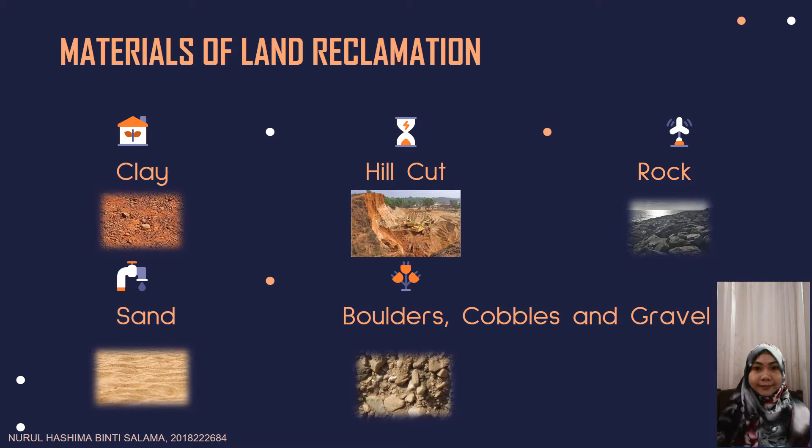Land reclamation methods. The first method is the infilling method. This is the most simple method, involving filling the area with large amounts of heavy rock or cement. The material used to fill the area is generally called infill. Next, the draining of submerged land method, used to reclaim wetlands or land for agriculture.

Third, deep cement mixing, typically used in situations in which the material displaced by either dredging or draining may be contaminated and hence needs to be contained. And the last one is land dredging. This is the removal of sediments and debris from the bottom of a body of water, used for maintaining reclaimed land masses, as sedimentation, a natural process, fills channels and harbors naturally.

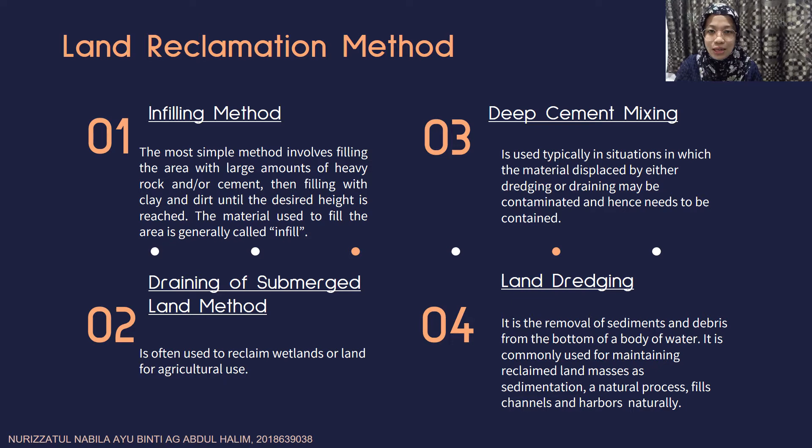Why do we need reclaimed land? The first one is land may be damaged due to natural hazards. Next, human activities, for example, poor farming methods. Third, cases of waterlogged land, for example, swamps and wetlands. And the last one is the problem of land scarcity, where it may be difficult to find new land to restore or improve.

Types of land that can be reclaimed. Derelict land or abandoned land. This land cannot be used until the damage is repaired; it is more commonly a result of human activities and sometimes natural disasters. For example, abandoned farming land, mining areas, and coastal land.

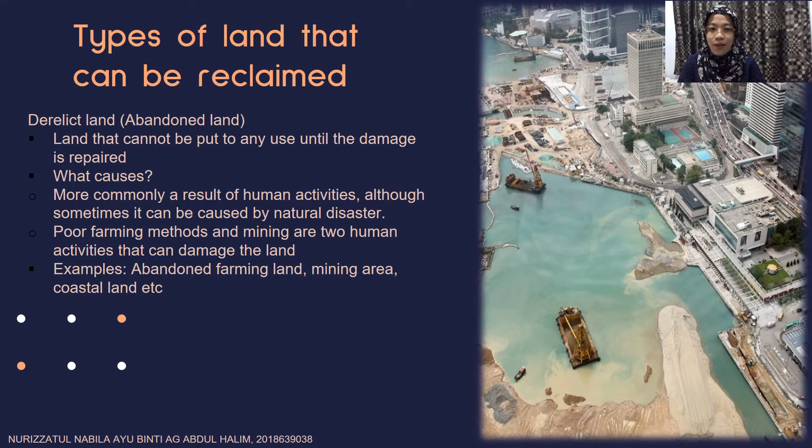There are several land reclamation techniques. They are the dry method, hydraulic filling, direct dumping, rehandling pit method, dredging, and sand spreading.

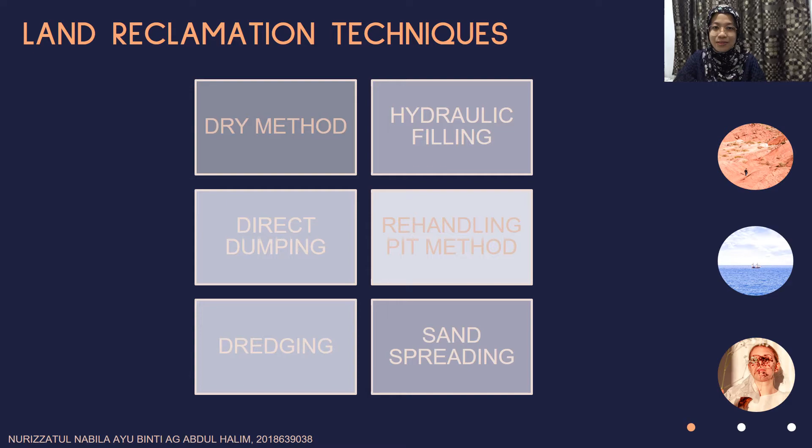Firstly, the dry method, suitable for filling material from land sources, especially rock, hill cut and clay fill. Filling or transporting clay fill material into the sea would create a viscous slurry, and it takes more time to become usable land. The dry method uses a truck or conveyor belt to transport fill material to extend the land towards the sea. This method also works well for foreshore locations with underlying competent seabed soil.

If the seabed soil is weak, because of displacement, a mud wave would be created in front of the fill. In that case, a greater portion of filling material will be required. Second is the hydraulic filling method, suitable for granular material and not for shallow seabed.

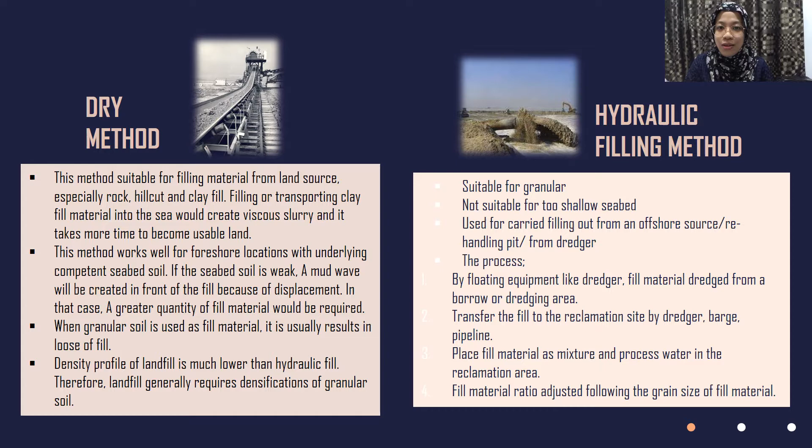This technique is also used for carried filling out from an offshore source. Third is direct dumping. This method is used when the seabed is deep. By opening the bottom of the barge, the fill material is dumped at the designated area. As shown on the slide, the bottom of the barge is opened and then the fill is dumped. This method is used not only for granular but also for stiff clay and soft clay. This method's location is generally controlled by a global positioning system.

Next, the rehandling pit method. It transports sand by barge and dumps the filling materials such as clay or rock only temporarily for storage in the pit. The capacity of the pit is normally a million cubic meters. It is dredging the sand at the borrow source by using a cutter suction hopper dredger, then transporting it to the rehandling pit.

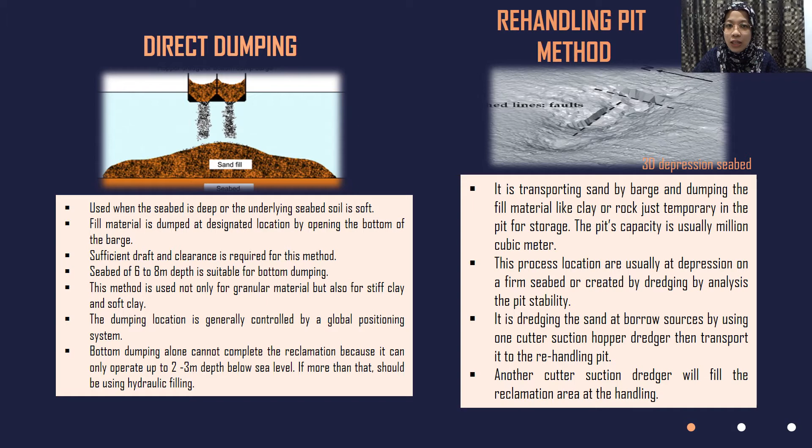Next, dredging. The dredging process is known as the removal of underwater sediment involving the method of excavation. Soils and rock are excavated for channel and harbor deepening, for land reclamation, and to keep the waterway navigable for ships and boats. It has different purposes, but the main objective is typically to recover material that has some value or to deepen the channel.

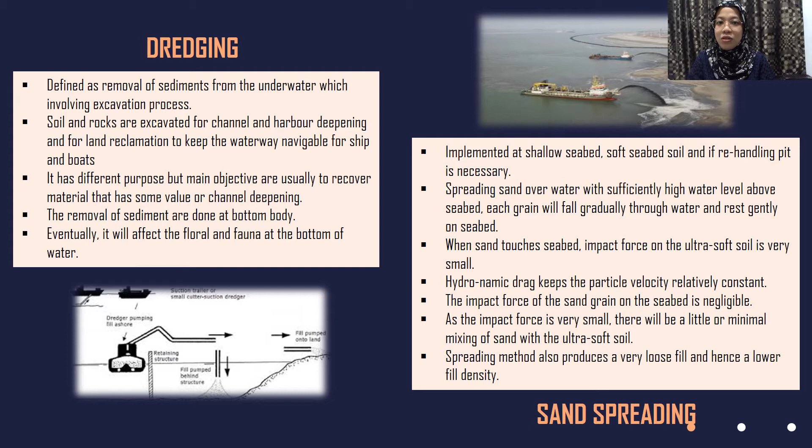And the last is sand spreading. This method is implemented at shallow seabed, soft seabed soil, and if a rehandling pit is necessary. Spreading sand over water with a sufficiently high water level above the seabed, each grain will fall gradually through the water and rest gently on the seabed. And when sand touches the seabed, the impact force on the ultra soft soil is very small. This method also produces a very loose fill and hence a lower fill density.

Benefits of land reclamation: 1. Improve agricultural land. 2. Help areas with restricted land use. 3. Reclaimed land can be used for multiple purposes. 4. It allows for further growth of a country's industries. 5. A feasible solution for the problem of overcrowding. 6. Expanding the carrying capacity of land and taking pressure off urban areas.

Challenges in land reclamation. First, initial drainage. The first phase of reclamation is drainage. This is necessary to improve accessibility, particularly if heavy equipment is to be used. The initial installation of drains at strategic positions allows access for equipment, either by temporary road or narrow gauge railway.

Second, burning. Apart from being a rapid way of removing the cut vegetation, the ashes improve the fertility of the peat in the initial years of cropping. Frequent burns can lead to rapid lowering of the peat surface, but more directly, it can lead to intensive peat fires when not properly controlled.

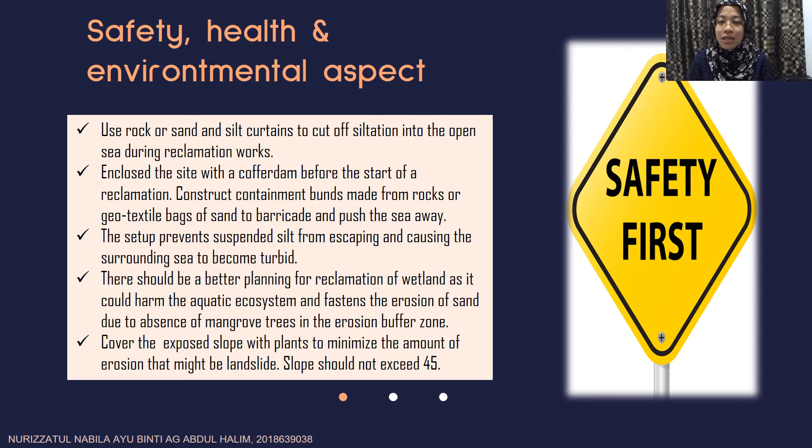First, regulated members stay current with land reclamation research, legislation, directives, guidelines, industry standards, and other reference documentation related to land reclamation. Regulated members regularly review the reference material used to support their practice and obtain more current versions when available. Attend conferences, workshops, and updates related to land reclamation. Communicate with regulators, research scientists, educators, and other practitioners to ensure they remain current with land reclamation knowledge and trends.

Second, regulated members understand the limits of their knowledge, skills, and experience, and seek the expertise of other professionals where necessary. Regulated members make appropriate scientific, technical, practical, and logistical decisions based on their education and experiential knowledge in land reclamation.

Apply their skill and use judgment in an ethical manner. Seek advice and input from other professionals when their expertise is insufficient to make competent decisions and recommendations. Third, regulated members clearly understand their role within the practice area. Regulated members understand their role in a land reclamation project and do not exceed the boundaries of that role.

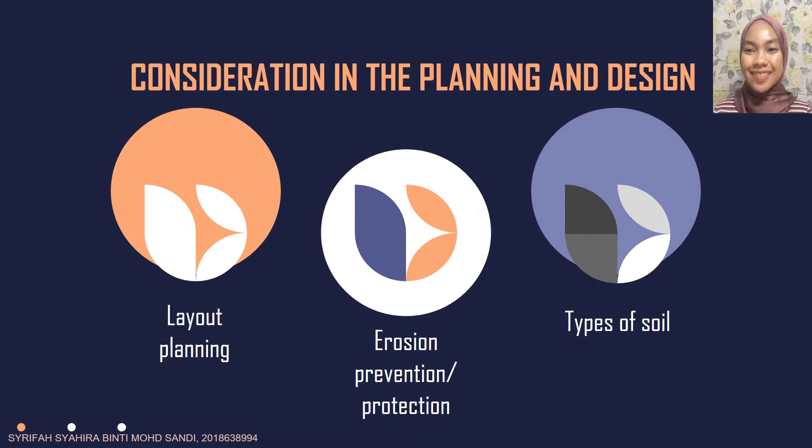First, layout planning. Any reclamation project should consider the hydraulic characteristics of the area, offshore and nearshore wave conditions, bathymetrical details, tide, and others needed for observation. The correct setting of platform level is critical to the functional performance of the reclamation works as well as its financial viability. A properly conducted engineering study is a proven and trusted approach to developing project layout and dimensions.

Second, erosion prevention and protection. Reclaimed land should be bordered by stable sandy beaches. The works to defend against erosion can be very costly and therefore must be accounted for in the outlay of capital costs. There are many forms of erosion protection measures such as revetment, articulated concrete slab or mattress, sea wall, and others.

Seawalls and other vertical face designs are typically not favored due to the possible incidence of excessive toe scouring and lowering of foreshore soil, resulting in structural failure. Another important consideration in the design of protective works is that it should not result in the transfer of the hazard of erosion to the adjacent shoreline. A classic example is groin construction.

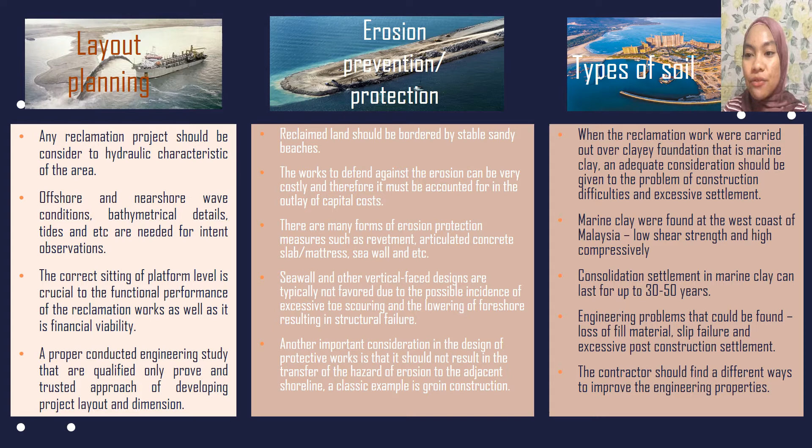Third, types of soil. When the reclamation work is carried out over clay foundation, that is marine clay, adequate consideration should be given to the problem of construction difficulties and excessive settlement. Marine clay is found at the west coast of Malaysia, with low shear strength and high compressibility. Consolidation settlement in marine clay can last for up to 30 to 50 years. Engineering problems that could be found are loss of fill materials, slip failure, and excessive post-construction settlement. The contractor should find different ways to improve the engineering properties.

Next, land reclamation guideline. As we know, the guideline is important when we do some work, to guide us to avoid unwanted work or harmful things that may happen during the process. For the land reclamation guideline, there are some policy and legal requirements related to undergoing land reclamation.

The reclamation guideline contains the important things that must be followed and cared for when we undergo a land reclamation project. First of the guidelines is site selection, to identify key potential project impact areas. The project proponent and environmental consultant corroborate the National Physical Plan 2005 published by the Department of Town and Country Planning in selecting the site to reclaim, in order to avoid coastal environmentally sensitive areas.

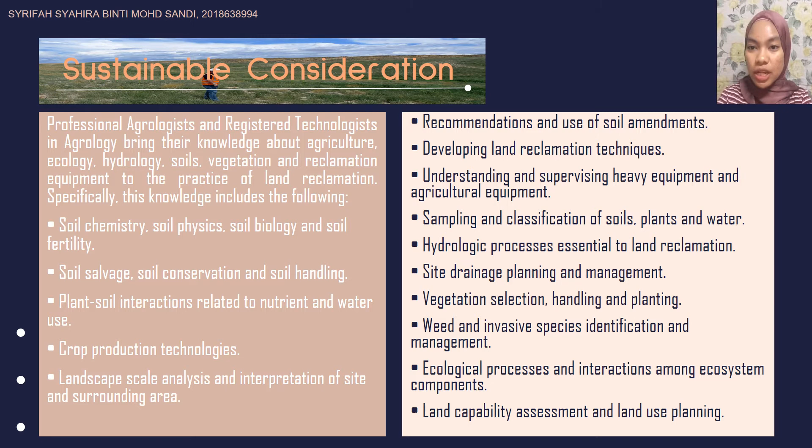For other related issues, this is the case study at Colombo Port City. This is located in Sri Lanka. The new city spans 269 hectares, which is 2.69 km². The project was launched on 17 September 2014, completed June 2019, and it cost 1.4 billion USD. It was co-developed by the Sri Lankan government and China CHEC Port City Colombo Ltd.

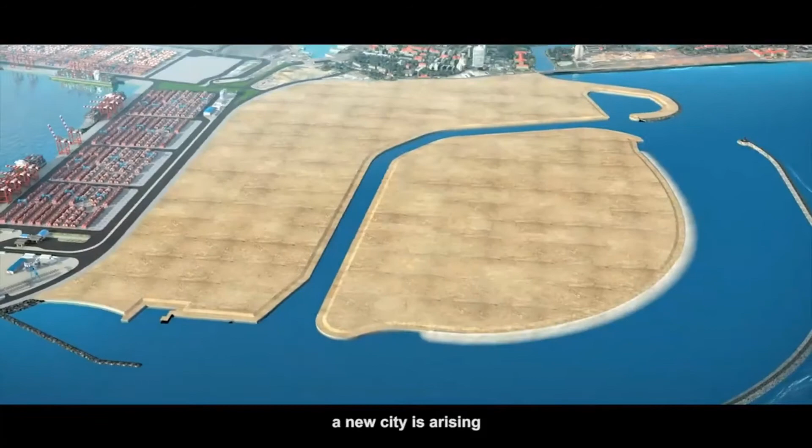At the crossroads in the east, by the shores of the Indian Ocean, a new city is rising. Port City, Colombo, is jointly developed by China Communications Construction Company, a Fortune 500 company, and the government of Sri Lanka. It is the single largest foreign direct investment in this country. Port City, Colombo's vision is to be a world-class city in South Asia, filling the void of financial centers between Singapore and Dubai. Forbes named it as one of 5 new cities that are set to shake up the future.

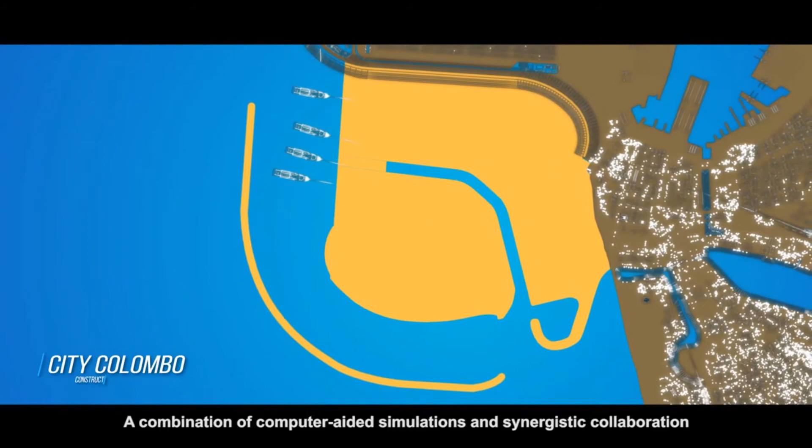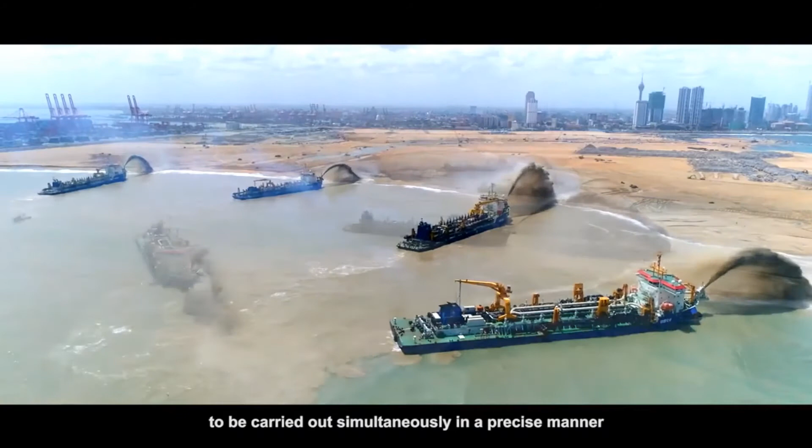In 2014, Chinese President Xi Jinping and then Sri Lankan President Mahinda Rajapaksa witnessed the opening ceremony, which commemorates the beginning of the project. Port City was reclaimed by using the open sea reclamation workmanship; a combination of computer-aided simulations and synergistic collaboration ensured the reclamation and breakwater construction to be carried out simultaneously in a precise manner. 4 self-propelled trailing suction hopper dredgers, including Asia's largest and most advanced Junyang 1, were involved, which enable reclamation to proceed 24/7 uninhibited by weather conditions and the southwestern monsoon.

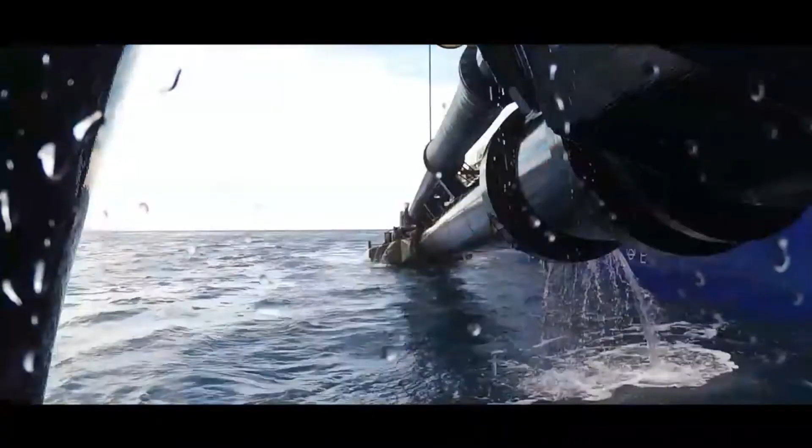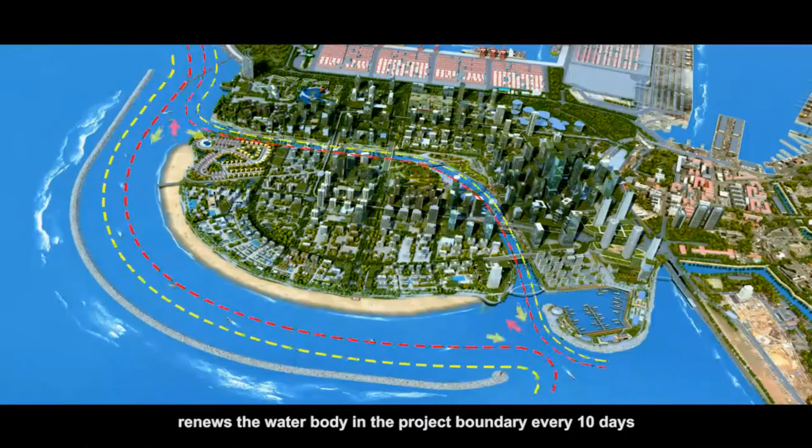The reclaimed land is then subjected to dynamic compaction and vibroflotation to ensure required consolidation density for further development. The waves of the ocean flow through the inner lagoon. An artificial canal renews the water body in the project boundary every 10 days, ensuring exceptional water quality. In January 2019, Port City Colombo completed reclaiming all 269 hectares of land.

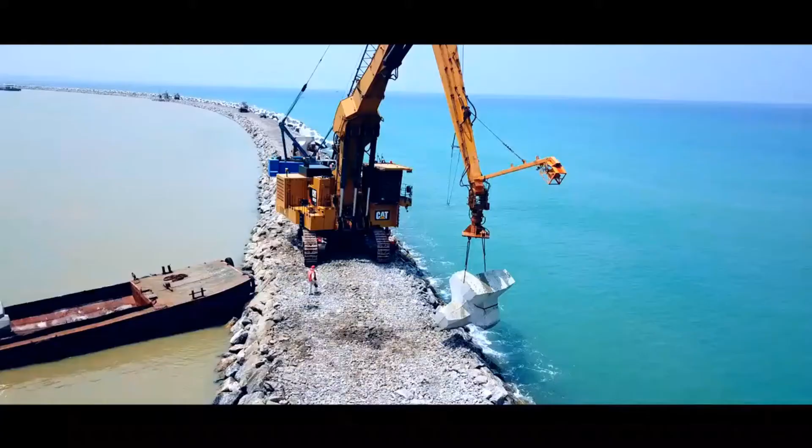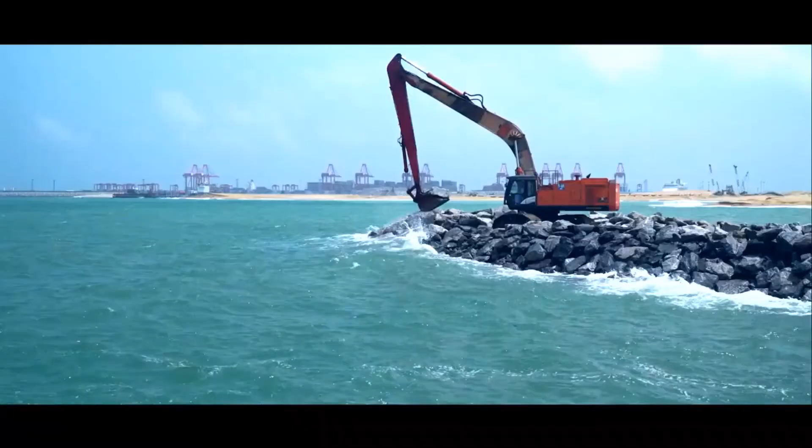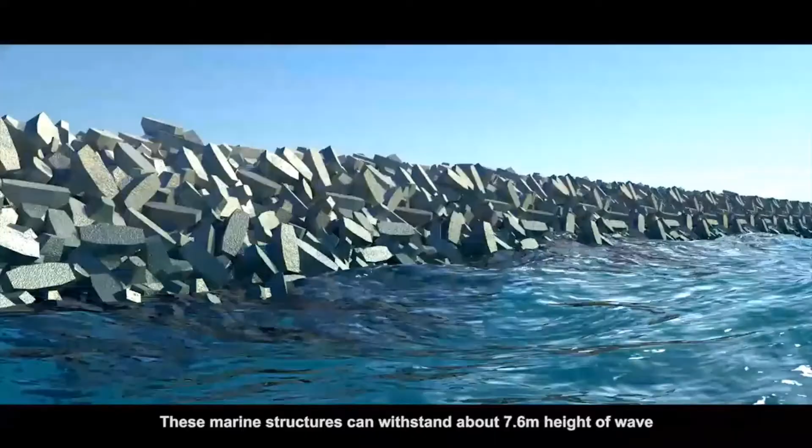The quality of the breakwater is greatly enhanced by using Asia's largest 200-ton excavator and the world's most advanced visualization system to assist in the underwater installation of the accropodes. The GPS visualized slope system with long-arm excavators ensures accuracy of slope profiles of the breakwater. Third-party independent professionals monitored construction activities to ensure compliance with strict environmental guidelines. In August 2019, the 3,245 meters long offshore breakwater and all other marine structures were completed. These marine structures can withstand about 7.6 meter height of wave, which is in 200 years return period with an overload safety factor.

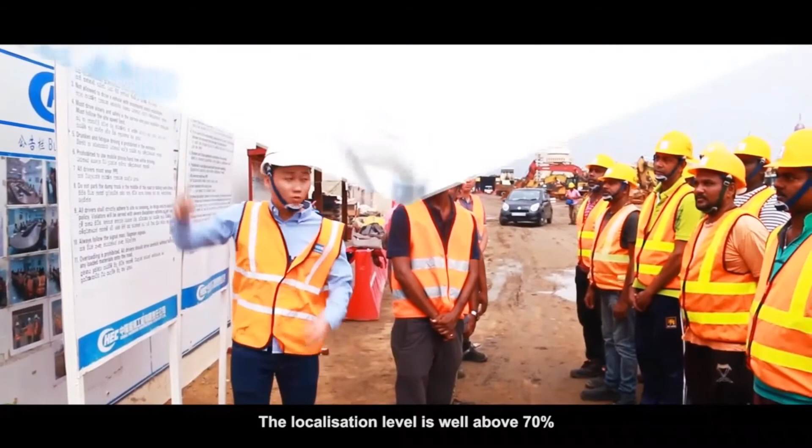To date, more than 10,000 Sri Lankans and 70 Sri Lankan companies have participated during the construction stage of the project. The localization level is well above 70%. Port City Colombo implemented the Fishermen's Livelihood Improvement Program, which benefited more than 77 fishermen's associations and approximately 13,000 fishermen and their families. It has also actively participated in numerous other programs and organized events such as Island Tour for National Unity, touching the lives of Sri Lankans in 1,500 villages. Let the people of China and Sri Lanka join hands to build a better future and a united community.

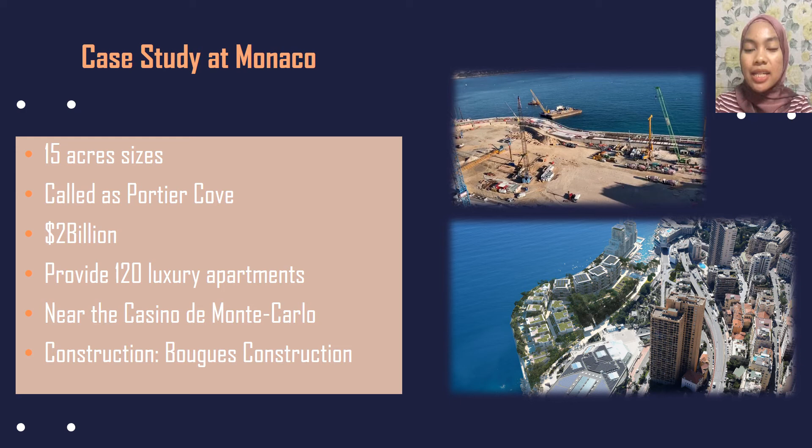Next, this is the second case study at Monaco. It takes 15 acres in size, called Portier Cove. It costs 2 billion and provides 120 luxury apartments near the Casino de Monte Carlo, and the construction is by Bouygues Construction.